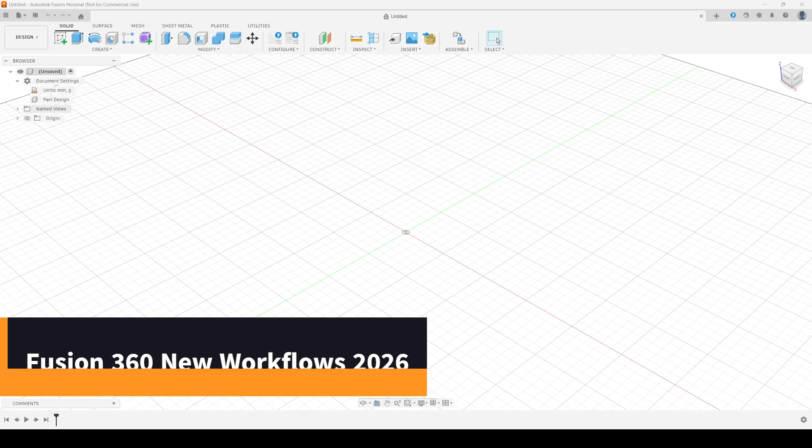Hi! The 2026 update changed the way Fusion starts a new design. You might notice the toolbar looks cleaner, some options aren't immediately visible, and the workflow feels a bit more structured than before. That's because Fusion introduced a new system called Intent-Driven Workflows.

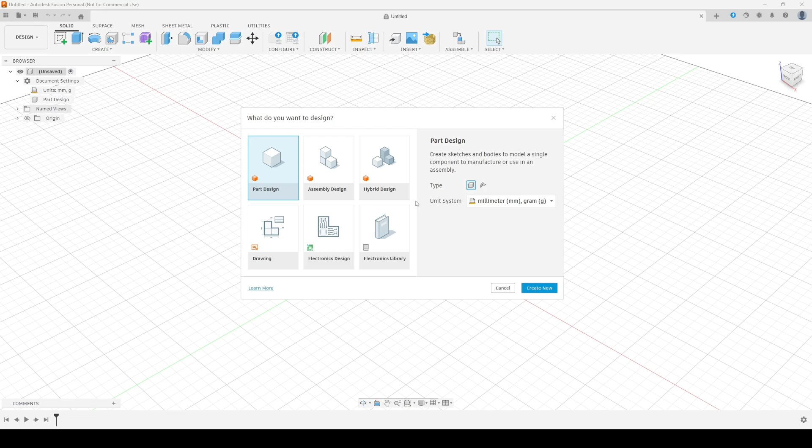Instead of throwing all tools into one environment, Fusion now wants you to choose your starting point and asks you one simple question before you start: what exactly are you trying to build? Are you designing a single part? Are you assembling multiple parts? Or do you want the classic all-in-one workflow?

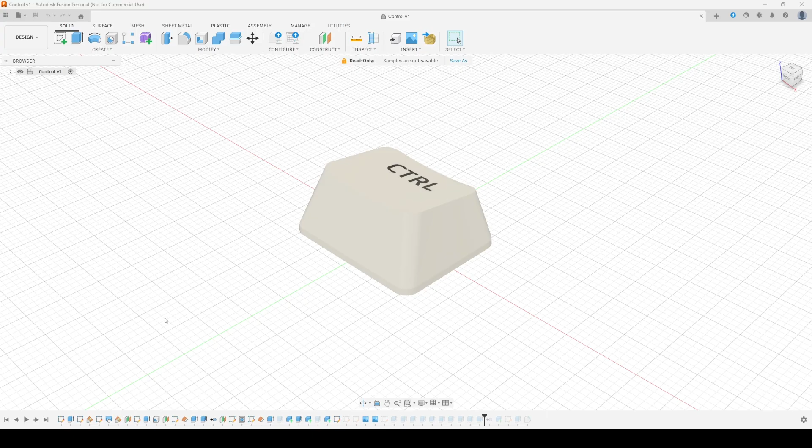Let's break it down. Think of part design as focusing on just one physical object at a time. Let's take a keyboard as an example. Instead of designing the whole keyboard in one file, we start with just a single key. So if you want to design the Enter key, that key gets its own part file. Here's the beauty of this.

You still have all your modeling tools, solid, surface, sheet metal, mesh, everything you are used to. But you're not overwhelmed by the rest of the keyboard. One file equals one physical object. Later, when you design other keys, like Shift or Spacebar, each of them is its own part file. This keeps your project clean and organized, and it's especially useful when you have lots of pieces. So basically, part design equals focus on one small piece at a time, perfect for detailed modeling.

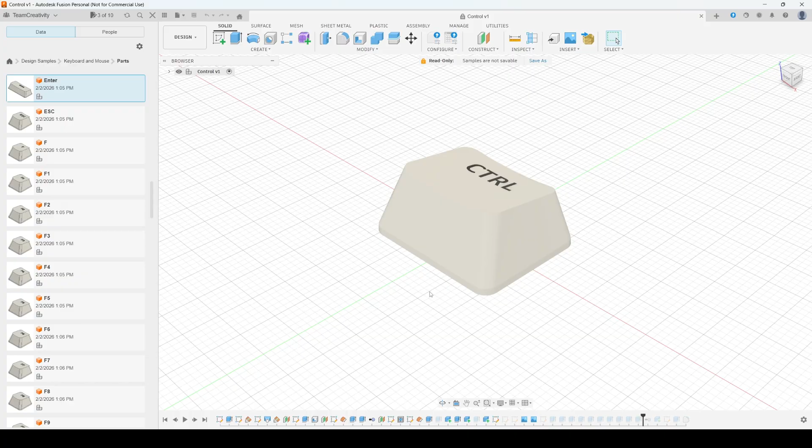Now let's switch to assembly design. This is where all those individual keys come together to form the full keyboard. In assembly, you are not modeling the shape of the keys anymore. You are defining how everything fits and moves together. You insert the Enter key, the Shift key, the spacebar, the base of the keyboard. Then use joints to position them correctly. The assembly file shows the relationship between parts, not their geometry.

And if you need to tweak a key, you can open it separately or use Edit in Place to adjust it directly inside the keyboard assembly. This is clean, organized, and perfect for managing bigger projects with many pieces.

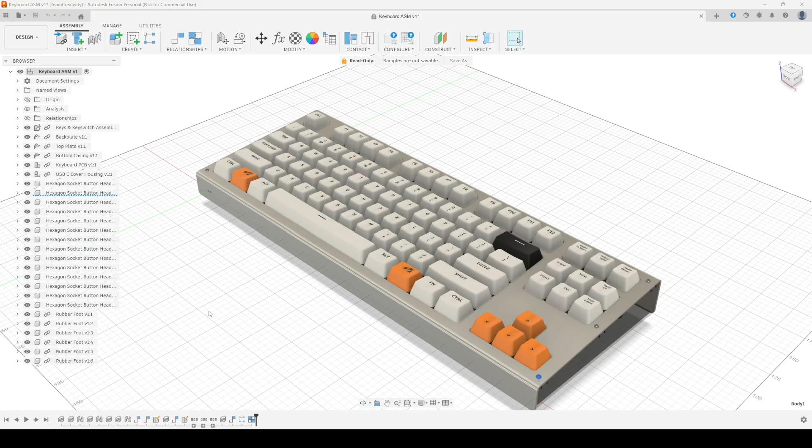Hybrid design is the traditional way Fusion has worked for years. You can create components, model them, assemble everything, all inside one file. Everything lives together. For small projects, practice work, or hobby designs, this is still perfectly fine. And yes, all the classic component tools are available here.

One small note. Fusion originally used the word component. Now you will see the word part more often. They basically mean the same thing, part, just aligned better with other CAD software.

If you ever start in the wrong workflow, don't worry, you don't have to start over. Go to Document Settings, Design Type, Convert. From there you can switch to another design type. Just remember, you can't convert an assembly with multiple parts into a single part file, because a part file can only represent one item.

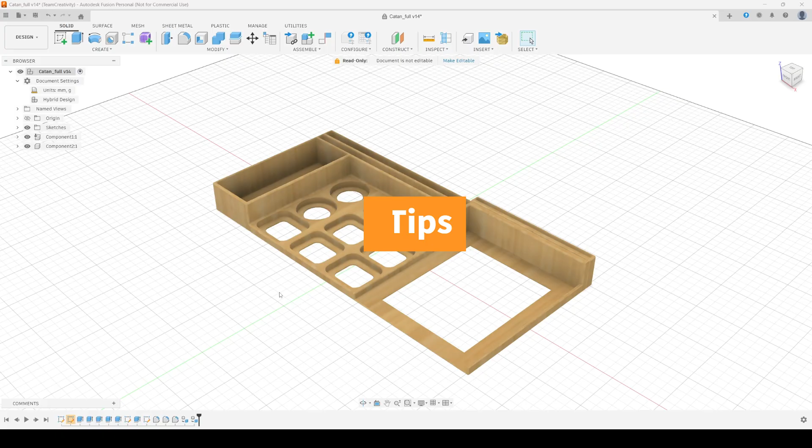Let me give you 3 quick tips. Tip 1: Most tutorials made before 2026 use hybrid design. If something looks different, switch to hybrid to follow along.

Tip 2: For larger or more serious projects, create each physical item as its own part file. Your assemblies will stay much cleaner.

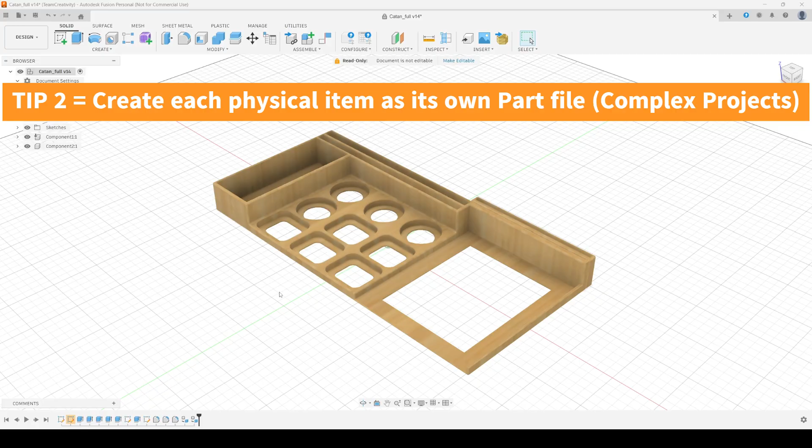Tip 3: You can set your preferred workflow as default. Go to Preferences, General, Default Design Type, and that's it.

The 2026 update is really about better organization. It might feel different at first, but once you understand part, assembly, and hybrid, the logic becomes very clear.